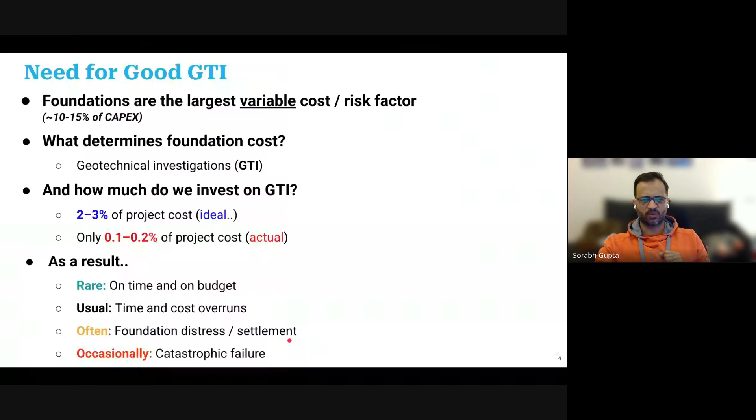So the first question is why - why is geotechnical so important in the industry? For any project, the foundation cost is the largest variable cost or risk factor. Typically these days the foundation cost will be roughly 10 to 15% of the capex or total project cost. This is huge because margins, especially on EPC contracts, are very tight. People are competing for the same projects, and if you can understand and optimize your foundation design, that is the only way to make money and also avoid a lot of risk.

The superstructure is pretty much predictable - the cost and time it might take to build it. The variable element on any project is only the subsurface. And what decides the subsurface, what decides the foundation cost? It is nothing but the output of the geotechnical investigation program.

How much should be spent on this? The international standard is to budget around 2 to 3% of a project cost for ground investigations. The reality in India is that for most projects, people are investing less than 0.2% of the project cost in investigations. The result of this is that we have a lot of delays in our projects - there's cost overrun, time overrun, sometimes foundation distress, and at times catastrophic failure.

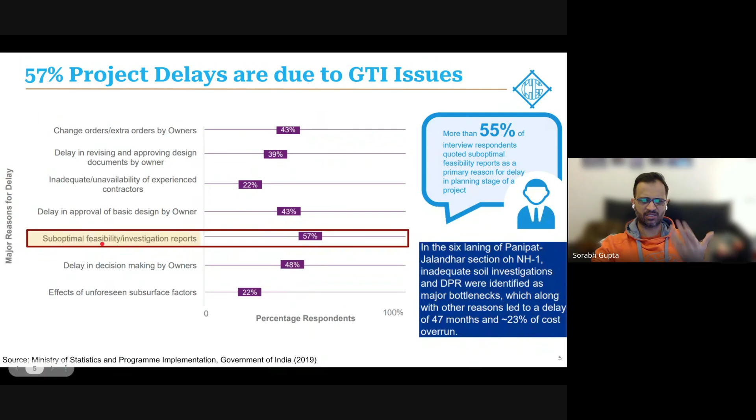There was a study by the NHAI, the apex body responsible for all highways in the country, a very interesting study by the Government of India in 2019, which showed that 57% of highway projects in the country had delays attributed to suboptimal feasibility or geotechnical investigation reports. If you calculate what this means in terms of cost to the government, that's huge - every delay is cost.

We have been talking about this, and I think as civil engineers who read papers, I find myself heartbroken when I come across news. I look at a lot of bridges which have collapsed in Bihar in the recent couple of years.

It's become almost so common that we don't even react to news like this. Some of you might remember, in 2019 there was a building collapse because of metro construction in Calcutta - a retention system collapse. Incidentally, in NCR we have had at least 2 or 3 retention system failures in just the last month. So these stories about collapse and foundation failures have become very common. It makes bad news, it makes Indian civil engineers look bad, and it's completely unnecessary because the only reason for this is our own apathy and lack of knowledge.

I love this quote by Professor Littlejohn. He says you pay for site investigations whether you do it or not - karo ya na karo, you have to pay for it, one way or the other.

If you read the papers, very recently, just a couple of weeks ago, there was a huge RE wall failure in Kerala. We are in conversation with NHAI as we speak. In fact, we are part of the committee where we are trying to rectify the issues and see what we can do about this.

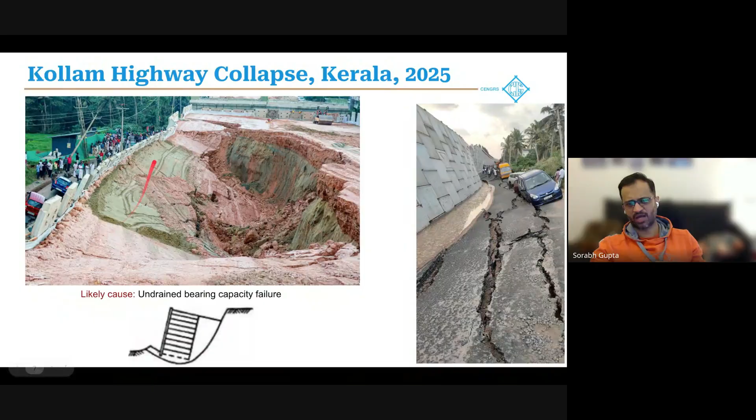Unfortunately, practically in India - and we've been doing investigations for the last 35 years, particularly for smaller projects - the story is very different. When you meet the customer, it's almost a negotiation. They want to negotiate, reduce or eliminate investigations if they can, or minimize them. They want everything done fast, and they don't care about the quality of the work.

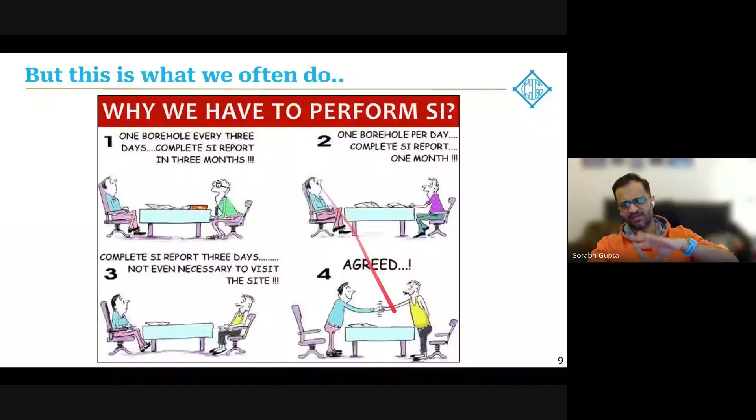And unfortunately, on the other end of the table, you have enough geotech consultants willing to accept these kinds of conditions and give a report without doing a proper investigation. This is really the root cause - this kind of scenario is the root cause for many of our problems. I think as students, when you're learning and graduating, you have to keep this in mind: when you go into the industry and see these practices, you have to understand that this is not right, and you have to fight against it.

The Indian scenario is poor in the sense that, although it's improving, it's improving slowly. Right now, I'd say it's still poor - a lot of our standards are still outdated, a lot of specifications are obsolete, and awareness of good geotechnics is very low among all stakeholders.

Owners, designers, structural consultants, architects, even within the geotechnical fraternity, awareness of good geotechnics is very limited, and that's what we are trying to change.

Through opportunities like this. There are very few good investigation companies. I would peg it at less than 1% of the total number of companies are actually good companies doing authentic data. Many companies are out there giving inauthentic data, inauthentic reports. They may not be carrying out all the tests and they're just fabricating reports.

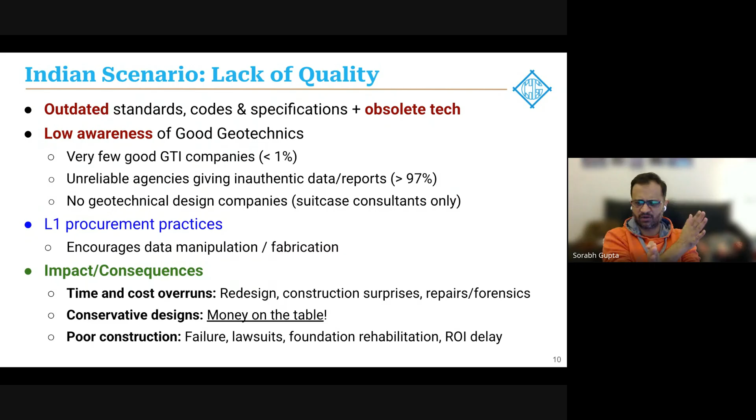On the other end of the spectrum, most of our other projects which are not falling down, it's likely because the design is over conservative. Conservatism is not good engineering. Conservatism is leaving money on the table. It's lazy engineering. Correct engineering is you have to be correct - you can't be over conservative, you can't be risky. You have to be just right, right where the money is. That is good engineering, and that's what we are trying to get to.

Similarly, in geotechnical investigation, we have some very conventional, simple, easily available tools like your boreholes, your DCPT, plate load test, and that's sometimes good enough if the symptoms are not very strong. But with advancements in medical technology and engineering, if you have some more serious symptoms, you go to a doctor who does some advanced tests, maybe a CAT scan, MRI, something. Same way, if your project complexity is slightly more - if you're building a larger structure or in a complex geotechnical scenario with complex subsurface conditions - you have to up your game and move to more advanced testing methods so that your foundation design decisions are based on data, not based on feeling or subjectivity.

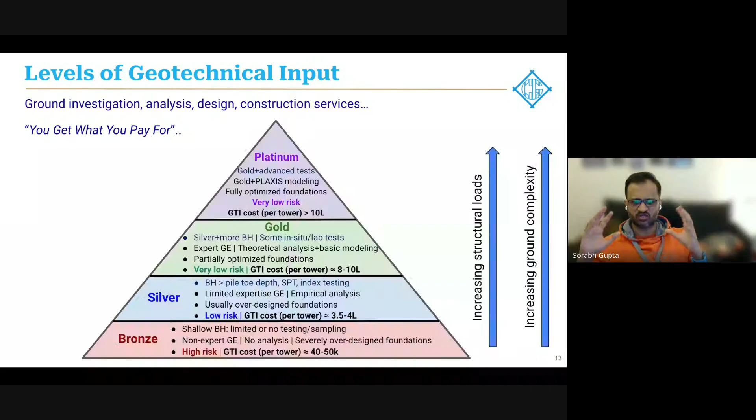As these things happen, you have to move up the value chain and the level of geotechnical input has to improve. In a gold level investigation, what we typically do these days is a staged investigation, where I combine my conventional boreholes with advanced in-situ tests like CPTs, pressure meters, cross holes, and so forth.

So I can have a better ground characterization, and by doing that I also improve my analysis part. I improve my analysis by looking at softwares, doing FEM analysis, and other complex analyses.

Now, the reason for going up the value chain is that as you do, your strength reduction factors will improve, your cost of foundation is going to reduce, and also your time of foundation construction will go down. It's very obvious that is how it works, and I'll show you today a few case studies on how we achieve this in practice.

So with this in mind, let's touch upon the areas of improvement. I think everything starts from awareness. Sessions like this, interaction like this, is how we all build awareness. We share from each other's experiences, we learn from each other's mistakes, and that's all about awareness.

That's number one. Number two is obviously the selection of the geotechnical consultant. Once you're aware, you'll automatically choose the best consultant, not the cheapest. Just the same way these days we are very aware about medical sciences, so all of us want to go to the best doctor, get the best test done. We are not looking for the cheapest doctor if I'm unwell - I'll go to the best if I can afford it.

Data reliability, I cannot overemphasize this. This is very important. A lot of students these days, it's become fashionable to just do your thesis with softwares. Softwares are great, but what you have to remember is that the input data which goes into a software is the key. If you don't understand where the input data comes from or which input data to use, you are simply doing garbage in, garbage out, and softwares will not help you improve your design.

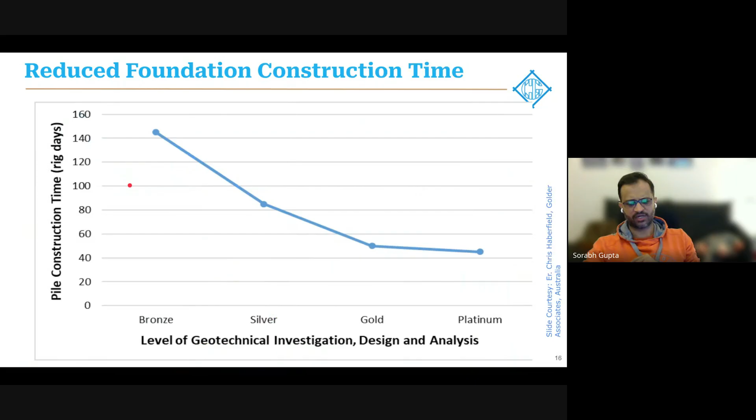Defining the SI scope - if you have a project, you have to define the scope of the geotech investigation. It cannot be a copy-paste job. The effort must be made by all the stakeholders: structural engineer, architect, geotech consultant. Everyone should sit down together, discuss what is being built, what are the likely challenges at the ground, and define the scope of the investigation so that we get all the inputs needed at the time of design, and there are no construction surprises.

Selection of SI tools is very important. As I said, you have to customize this. You cannot just do borings everywhere. Depending on the site, you have to choose the tools that you have to use.

So we can come up with some kind of a risk-based flowchart for site characterization, again very similar to the bronze level. If you have a low-risk project, you can do a simple bronze level investigation. But as your project complexity or risk levels go up, it is important to tailor make your SI program.

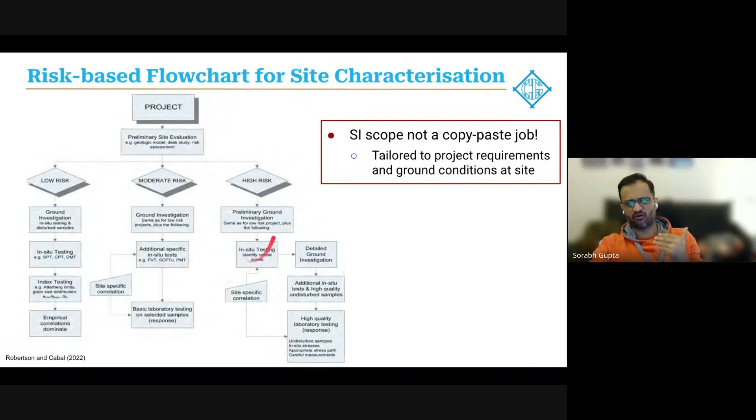So you may have to do a staged investigation. Maybe you do a preliminary ground investigation, get a little bit of data. You may have to follow up with in-situ testing, detailed investigations, site-specific correlations, lab testing, and so forth. So there are stages, and this flow chart has to be defined early on in the project, so we know where we are headed.

So we talked about why investigations or good geotechnics is important. We talked about what good geotechnics is. Now let us look at some of the tools.

This is a slide also by Professor Mayne, and I love this slide because I think particularly in India, if people talk about geotechnical, they think about boreholes. We want to change this because I think it's time. Boreholes are good in their own place, and the strength of borehole investigations and SPT is only in the fact that it is cheap, it is easily available, and we are comfortable and familiar with it. But that does not mean that boreholes are enough.

Over reliance on SPT N values is not good. SPT stands for standard penetration test, but there's nothing standard about the SPT value. It depends on all of these parameters. Very honestly, if you do SPT at the same site, maybe at two different locations, or two different companies are doing it, chances are the SPT values are going to be very different from each other. So it's hard.

Borehole investigations, I feel, are hard to get right. It's a very manual, slow process, and there are many uncertainties, many sources of error. So it's very hard to get borehole data right. You have to remember, it's not just SPT, it's sampling, the way you collect the samples, the way you transport them, the way you do your lab testing. You have to be very serious, and you have to have a very robust process to get this right. Keep in mind also that in boreholes, a lot of the interpretations we have based on borehole data are going to be empirical and based on judgment.

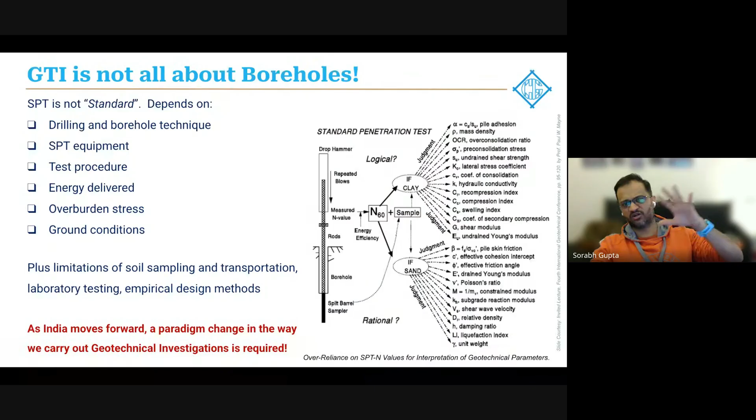So it is very important as India moves forward, I think a paradigm change is required in the way we carry out geotechnical investigations. 20 years back, when I started my career in the US, even at that time, they used to do very few good quality boreholes, and they used to do a lot of in situ tests for all kinds of projects. It's taken us in India, unfortunately, 20 years to get to that stage. But nowadays, when we do investigations, things are changing. We are doing fewer boreholes, and we are depending more on in situ testing.

Speaking of boreholes, let's understand standard penetration test because this is here to stay. I don't think the SPT is going anywhere. You will need this on many project sites, largely because of its ease. It's easily available everywhere, right? So let's see how to get SPT right. I would talk about two, or rather three things.

The first is you have to remember the weight of the hammer has to be calibrated. Second, anytime you see a borehole report, you have to go back and ask the agency if they have used an automatic trip hammer. Why an automatic trip hammer is important is because if the height of fall of the hammer is not consistent, your N value is incorrect. IS 2131, incidentally, has been published this year. It also mandates the use of an automatic trip hammer system. Many kinds of SPT arrangements are there, but having an automatic trip system or release system is very important.

The third thing which is very important, if you look at the books, if you look at values, the N value is always written as N60. N60 means 60% of the potential energy is being transferred to the ground. Now, you don't know if it is 60% if you don't measure the actual energy transfer ratio. So how do you measure it?

You use an equipment like this. It's called an SPT analyzer. What this does is you have an instrumented rod, which is placed here in line with the SPT equipment. It's got accelerometers and strain transducers built into the rod. So when you actually carry out the SPT, this equipment will measure what is my energy transfer ratio. So the ETR value, once you know, you can correct your measured N value to N60 value.

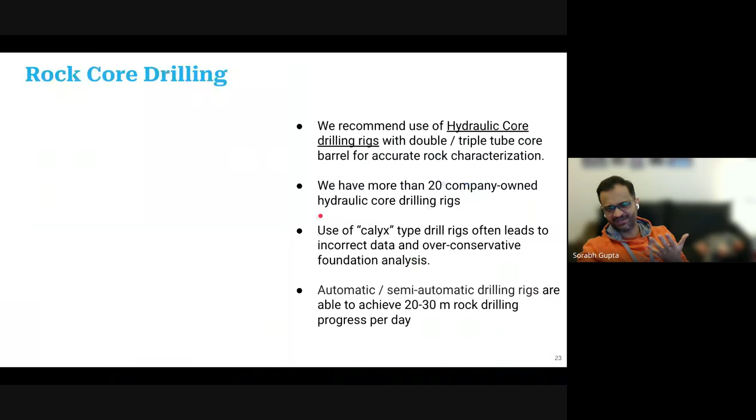Why is that important? Supposing I have a site where my SPT N value is 10 and I assume a 60% ETR, I'm going to calculate an SBC value of 100 kPa. But in most cases, if you use an automatic trip hammer, we have seen that the actual ETR is around 75-80%. What that means is the N value of 10 should be corrected to a value of 13. That means your actual SBC value is not 100 kPa, it can be bumped up to 150 kPa. Now, 50% increase in your bearing capacity value, you can imagine the amount of cost saving the customer can get. On the other hand, if the actual ETR value is 40%, that means my 100 kPa value was incorrect and risky, and it should actually be around 75 kPa.

So irrespective, the takeaway is SPT energy and automatic trip hammer should be mandatory for all investigations done using boreholes. This is changing these days. We are also pushing to have it changed in the specs. But we have to remember that these two things should be made mandatory.

If you look at rock drilling, what I want to explain to you is if you have a site, like in Shimla also you have a lot of rock, you have to remember that most of the geotechnical design is done based on core recovery and RQD values. Now, core recovery and RQD is also a function of the tools which are used during investigation.

So if you're using a calyx kind of drilling machine, or single tube core barrel, what will happen is that your rock core in situ might be solid rock, but because of the sample extraction process, if there is vibration in the machine or if the tools are not good, those cores will break while coming out. So when they come out, you look at the rock core and feel, oh my God, my rock is highly fractured, I should probably use a very low SBC value for design. Whereas the issue was with the tool, not with the rock formation.

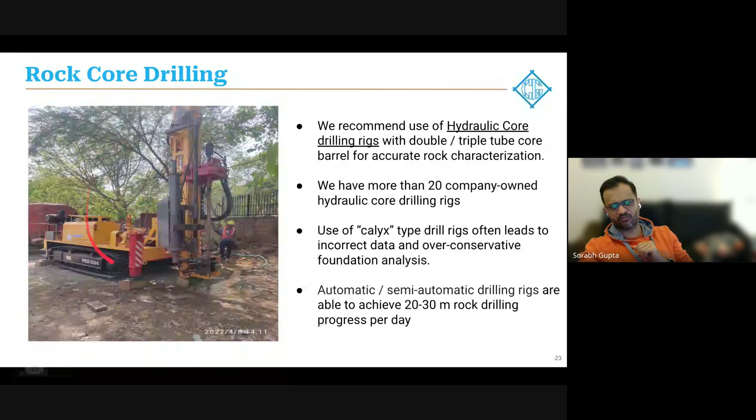So using these kind of proper hydraulic drilling rigs is very useful because this is the amount of difference it makes. This is a site on the river Tapi which we did a couple of years back. The customer had done a soil investigation work report already, and the design was already finalized. As per the report, the core recovery values were in blue, they were very low, and the RQD values were also very low. Basis that, they designed these huge footings for the bridge.

Unfortunately, when the contractor went to actually do the construction and started the excavation process, the contractor complained that the rock was very hard, which was not expected. So the work got stopped, they were unable to excavate, so they called us in.

We went back with a hydraulic rig with triple tube core barrel. We did some confirmatory investigations and we realized that the actual core recovery values were very high. They were not these blue values, they were the pink values. The RQD values were also much higher.

When we redesigned the foundations, we realized the impact of this exercise was that we could reduce the size of the foundations, we could reduce the depth of the foundation. And just for an investment of 15 lakhs, the customer managed to save almost 2 crore rupees only in foundation cost saving, let alone the time saving.

So that is the power of good geotechnics. All it takes is awareness. It doesn't take money, it doesn't cost much to have these kind of savings. You only need to be aware of what is the right thing to do.

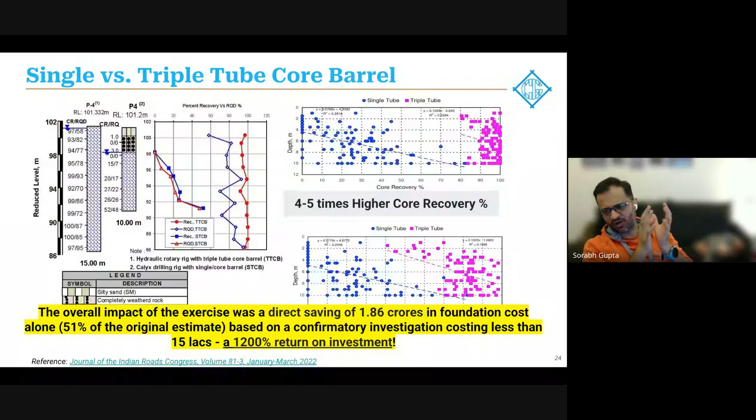So I'll recap: with SPT, automatic trip hammer and energy measurement is mandatory. If you have rock and you are coring in rock, insist on a hydraulic drilling rig with a triple tube core barrel. That is the industry standard as well.

The third thing, even in conventional borehole investigations, is make sure that the laboratory is well equipped. It has sufficient equipment, sufficient technicians to be able to handle the amount of testing that is required. I cannot overemphasize this.

Unfortunately, a lot of investigation companies are not doing the lab testing. They're simply taking the samples, doing a few tests, and fabricating the rest of them. These kind of spurious reports are creating a lot of issues in the industry. So we have to be sensitive, we have to be aware of this. We have to know, as a good geotechnical engineer, how to assess a laboratory for its capability.

Another thing, remember I told you that GTI is not just about boreholes. So these are all the tools which are available to us. Many of these tools, until around 10 years back, were not present in India, but these days I'm happy to say several of these tools are available with us, with a lot of companies, and we must learn about these tools and which tool is good for what kind of ground conditions.

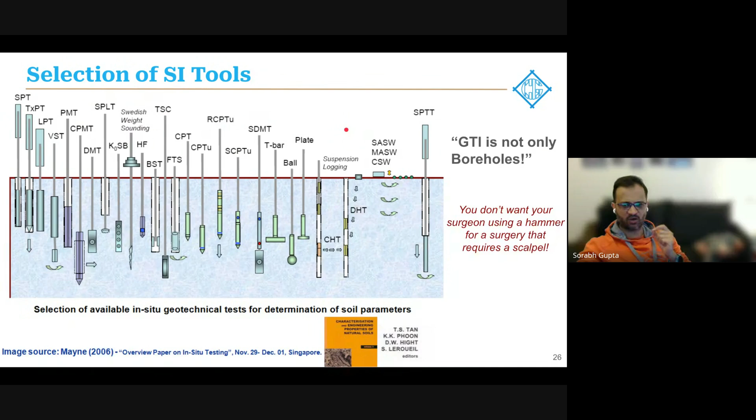So of these, I want to give you a quick introduction on a few tools. The first one is the electric cone penetration test with pore pressure measurement, also known as the CPTU. I think Dr. Abhishek will talk about this in detail in the next presentation, but I'll just introduce you to what this is. Around 60 or 70 years back, they invented the CPT cone.

So this is an electric cone, a piezo cone, as it's known. It has built-in sensors for measuring the cone tip resistance, measuring the sleeve friction, the pore pressure, depth, inclination, and sometimes even geophones and other things. There is no borehole involved, directly you take the cone and it can be pushed into the ground. As you push it into the ground, you get this data in the laptop: the cone tip resistance, the sleeve friction, and the pore water pressure.

Let's compare boreholes versus CPT. I'm giving you the advantages here - how the test is done, Dr. Abhishek will cover. The first benefit of CPTs, and the greatest benefit, is time.

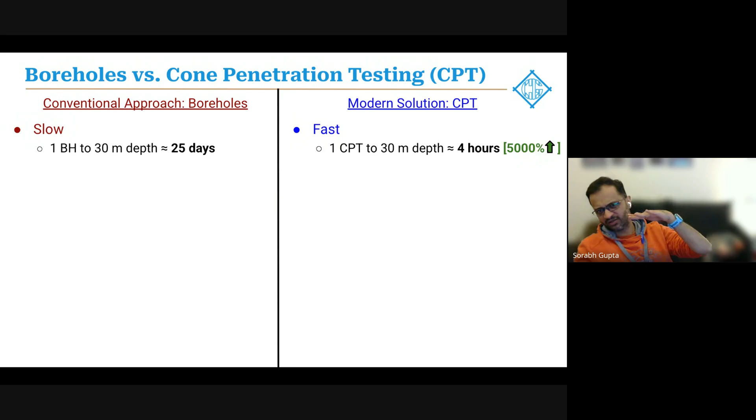One borehole to 30 meters - by the time you do the sample collection, take the samples to the lab, do the lab testing, you get a report in around 20 to 25 days. In a CPT, it's very quick because it's a digital technique - you just push the cone down. You can do a 30-meter test and get the report in just about 3 to 4 hours. That's huge, because it means you can collect a lot more data for a lot less money and in a lot less time.

The second comparison is that borehole data involves doing SPTs every 1.5 meters, so sometimes you might miss a few layers in the ground, and that becomes a surprise later during construction. In a CPT, because it's digital, you're taking data continuously with a resolution of 1 centimeter - a data point every 1 centimeter. Even a thin seam in the ground can be caught with CPT, which I'd definitely miss using a borehole.

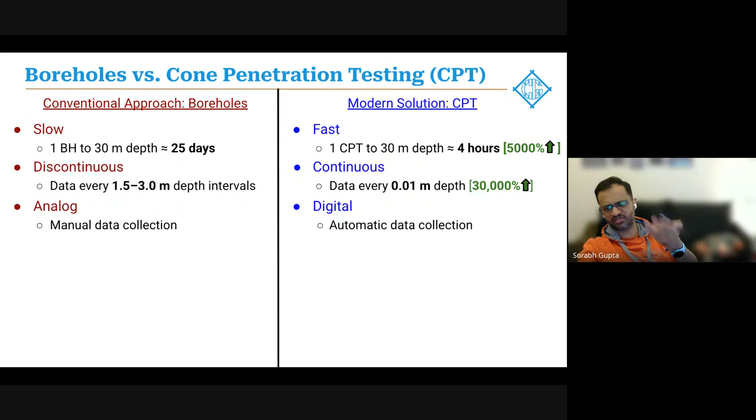Boreholes involve manual, analog data collection, so there are many sources of error - human errors, transcription errors, and so forth. CPT, because it's digital, doesn't involve human beings in that way. As long as the cone is calibrated and you just push it, irrespective of who's operating it, which company, or what tool is used, you get the exact same data every time. Digital data gives you repeatability, reliability, and no transcription errors - the file is created, imported into software, and the software generates a report. Because of this, reliability of the data is very high.

The last point is that CPT is very versatile. In a borehole, typically the only field measurement you get is the SPT N value. Whereas with a piezo cone test, you get multiple measurements at the same time - cone tip resistance, friction ratio, pore pressure. You can also stop the cone and do a dissipation test, getting T50 values which give you an idea of consolidation and permeability. And if you're using a seismic cone, you can also test for the shear wave velocity profile at the same time - much more versatile.

The most interesting part is that these days, at least at Cengrs, post-COVID we got the cost of CPT down to the same as the cost of boreholes. Earlier, CPTs in India used to be very expensive. Now, whether you do a borehole or a CPT, it's the same cost to the customer - whereas obviously CPT is cheaper, faster, and better.

The other good news is that we've also imported CPT samplers. So what we do now is use the CPT equipment to push a sampler - this is known as a MOSTAP sampler. We can push this sampler into the ground and take fairly intact soil samples at any desired depth. This is also a huge advantage of modern CPT equipment.

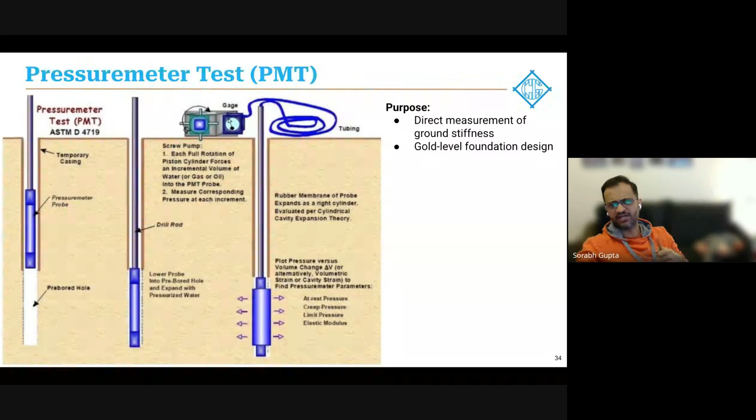How it works is you basically have a pressure meter probe like this, which is lowered into a borehole. When you lower it, you expand the probe. It's like a balloon. As it inflates, you expand it and measure the pressure versus volume graph. The slope of the pressure versus volume graph gives you the in situ measurement of the ground modulus. Simple as that—it's a very simple test.

The advantage of this test is, normally, how do you get modulus values? You'll do a borehole, get your SPT N values. You may or may not correct your N values to N60 or N60CS. But whatever empirical way you correct your N value, you typically have to plug it into one of the formulas—maybe a Bowles correlation, which gives modulus based on N value as 2.5N plus 15. So you'll get this kind of a profile.

But there are 5,000 other correlations with the SPT N value. Pick a different correlation, you might get a different ground modulus profile. So you see how if you're solely based on empirical correlations with SPT N value, your understanding of the actual ground modulus is going to be very poor—not only because of variability in the actual SPT N values, but also because of variability in the modulus values as interpreted from them.

What you must take away from this is two very important concepts. The first is, if you have a way of doing in situ testing, it's very likely that your degree of confidence in your ground modulus value will be a lot higher, because they're direct measurements, and because usually if two different methods agree with each other, that gives you a lot of confidence in your input values.

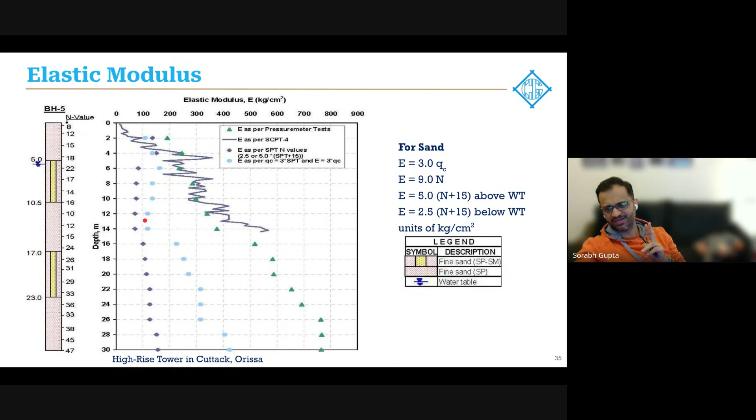Number two, in this case, at the founding level, the actual modulus value as measured from CPTs and pressure meters was 4 times higher compared to what we were getting from correlations. This tells us that our actual ground stiffness is very often much higher than what we think it is. And what that means for all of us as engineers is there is tremendous potential for optimizing our designs in most cases. So this is key.

No matter what we do, when we sit down to define the scope of investigations, this is where we should think: how am I going to get not only the strength parameters, but also understand the ground modulus, the stiffness parameters of my site, so I can give my customer a very good geotechnical design.

So that's with the pressure meter. I want to touch upon seismic testing also. I think in the years to come, starting this year, this has become very, very important. And in the next 20 years, all of you will see a lot of seismic testing happening.

Why? What is seismic testing and why do we need it? The Indian BIS standard, IS 1893 Part 1, has been revised last month. And now, finally, after a lot of time, I think this new standard mandates that you have to define the site class based on shear wave velocity.

For most buildings in most parts of the country, you will mandatorily have to do seismic testing in situ on the site in order to get your site class. The site class has different classes for the site, which is used in the seismic design of the structure. So you need seismic testing or shear wave velocity testing, as per the code, in order to determine the site class. So that's reason number one.

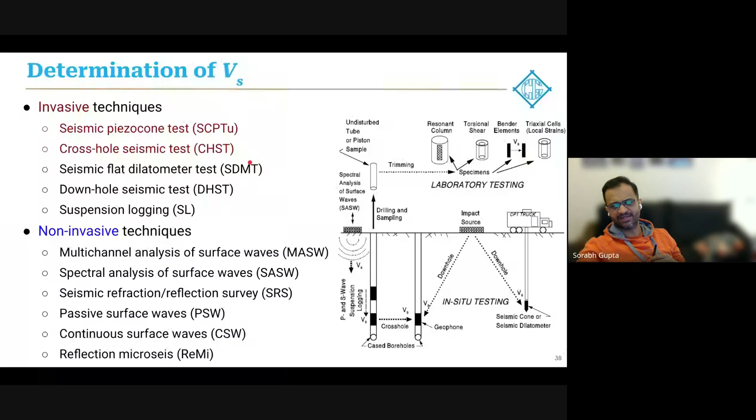This is what a cross-hole seismic test looks like. Very quickly, you make 3 boreholes - this is what the equipment looks like. You lower a seismic source in the first borehole, and triaxial geophones in the other 2 boreholes. When you impact the source, energy is produced along with waves which travel in all directions, and these geophones catch it.

There's another option. Remember we talked about CPTs - we'll discuss seismic CPTs in detail. The piezocone can also be upgraded by putting a seismic module above it, and then this is called a seismic cone, SCPTU - Seismic CPT, U stands for pore pressure. This is the latest technology. In fact, I think we are the only ones in the private industry to have a seismic cone so far. We imported a seismic cone for the first time less than a year back, and we're getting some fantastic results. I'll tell you why.

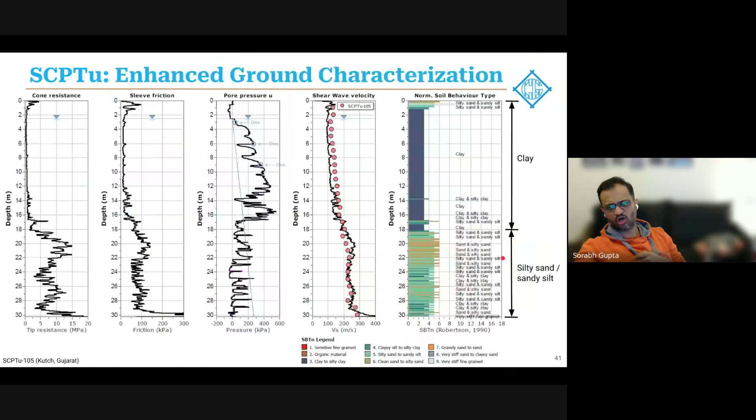In an SCPTU, a seismic CPT, this is what the data looks like. With a single push you get cone tip resistance, sleeve friction, pore pressure, shear wave velocity, and soil type. This is the power of in situ investigation - so much data at the drop of a hat. A single SCPTU test is very versatile - it gives you soil behavior classification, strength and stiffness parameters, consolidation and permeability parameters like OCR, and if you're doing a dissipation test, you also get permeability characteristics. A lot of parameters from a single test.

I'm going to skip this, I think it's very theoretical. I'll quickly show you some of the others. So these were all geotechnical tests - I'll quickly show you some of the geophysical tests which are also available.

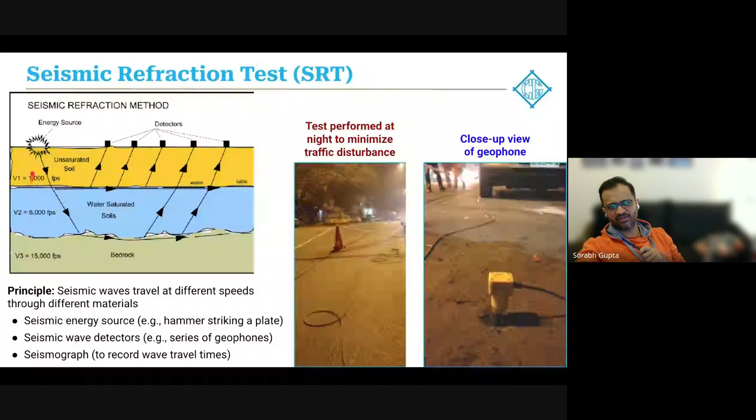If you have a site with varying depth of rock and want to understand how the rock depth varies across the site, a seismic refraction test is a fantastic geophysical test. You spread geophones along the ground, use a surface hammer, and by Snell's law you can figure out the velocities of different layers and where the hard layer or rock starts. That's what seismic refraction test data looks like.

I always emphasize that if you're doing a geophysical investigation, you must cross correlate the results with actual geotechnical investigation results. These two things are like brother and sister, they have to go together. You should avoid doing geophysical investigations standalone - always correlate and double check your data before moving to the design phase.

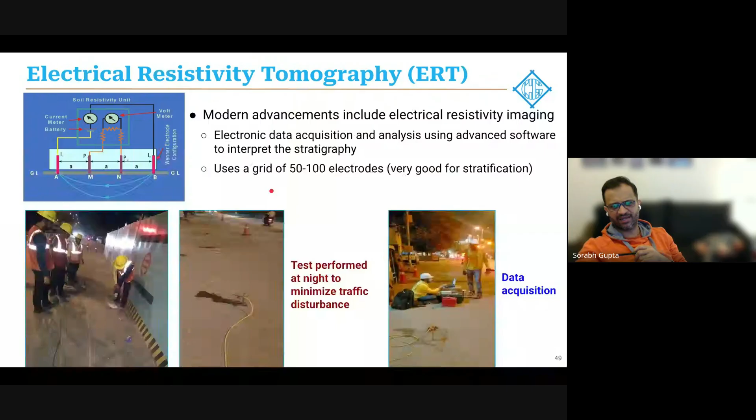This is electrical resistivity tomography, ERT - this is the kind of data you get from it. It's a very good geophysical tool, not only for profiling but also for detecting voids and other anomalies in the ground. You have other tools like SASW, Spectral Analysis of Surface Waves, and MASW, also very good profiling tools and good for getting shear wave velocity profiles fairly quickly and economically across a large site.

So these were the tools. Let me recap - we talked about what good geotechnics is and why it's important. We touched upon some of the latest geotechnical and geophysical tools for getting proper authentic data. Now let us see practically in the industry how we have leveraged this information to benefit our projects and our customers.

This is the first example - some of you might have read about this. We are working on India's largest wind turbine project, in the state of Gujarat, in a place called Khavda, in the Rann of Kutch. There, we have done investigations for 263 wind turbine generators - those big windmill structures that produce electricity. The scope given at each of these WTG foundations was boreholes and cross-hole seismic tests.

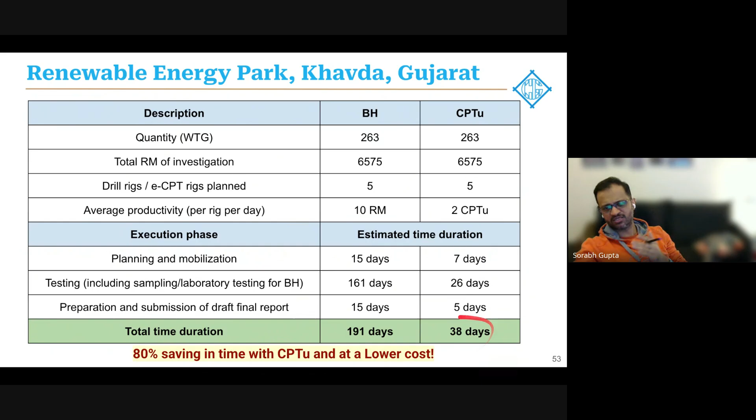And the data, the results - we actually did boreholes and CPTs at the same location to illustrate to the client how you get the same data. So we got the borehole data, next to it we did a CPT, and then we compared the soil type from the borehole and the CPT - it matched very well. We also compared the SPT N values.

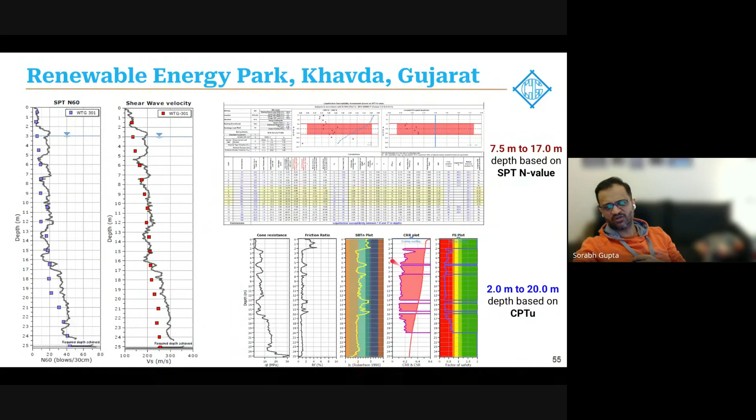So you see how, had we done a borehole and crosshole investigation versus what we do from CPTs, the output is the same or sometimes even better. Liquefaction analysis particularly was an issue here.

Same customer, different site, again in Gujarat, in a place called Mundra. Again terrible soil conditions. The client already had a basic borehole investigation report, basis which the safe pile capacity theoretical was calculated as 158 tons. This was a huge petrochemical facility, so the number of piles was 50,000, and 1,000 crore was the cost of the foundation alone.

We saw this report, and when the customer came to us and we looked at it, we felt, hey, number one, your borehole data does not look very reliable. It seems like the work is not being done, the lab testing has not been done properly, and we also felt that the pile capacity seemed to be over conservative. So the client asked us to do a confirmatory investigation.

We went back and we did CPTs, I think a lot of CPTs, 200 or 300 across the entire site. Basis that CPT data, we re-evaluated the pile capacities and revised the pile capacity from 158 to 320. And that's huge, because if you can justify higher pile capacity, the number of piles and the cost obviously went down to half. So 500 crores is what the client could save just in the cost of the piling system.

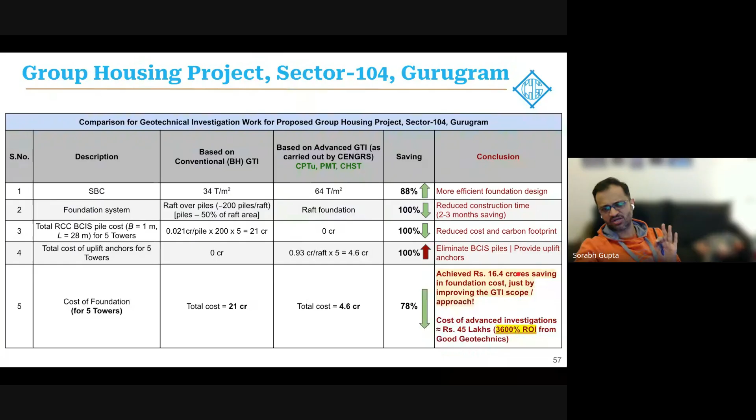So you see how, even if the client invested 45 lakhs in the investigation program, if I can save him 16 crores in foundation cost, there is no one happier than my customer, and it's a win-win situation for everyone involved.

Another example is this. This was for a greenfield steel plant in Ludhiana, in the state of Punjab. Same story.

The original report was based on piling, and the budgeted foundation cost in this case was 350 crores. We went back in and did around 125 CPTs, some 25 bores, and other tests. We managed to reevaluate, and the revised foundation cost was only 135 crores, simply because the site was liquefiable. We managed to optimize the liquefaction depth and the depth to which ground improvement was required, and based on that, this is the amount of money we managed to save for the client.

Possibly the last example is a very interesting project where the client came to us and said we have to build food grain silos in 66 locations across North India. So they came to us and we did the analysis at one location - this is Balrampur, Uttar Pradesh.

Same story. The client had done a conventional investigation program. It took around 46 days, cost around 2 lakh rupees, and they got this kind of SBC and a 4 crore ground improvement cost. So we went back to them and said, hey, not only is this over conservative, it's also taking too much time to do boreholes, and time was of the essence - this was a very fast project.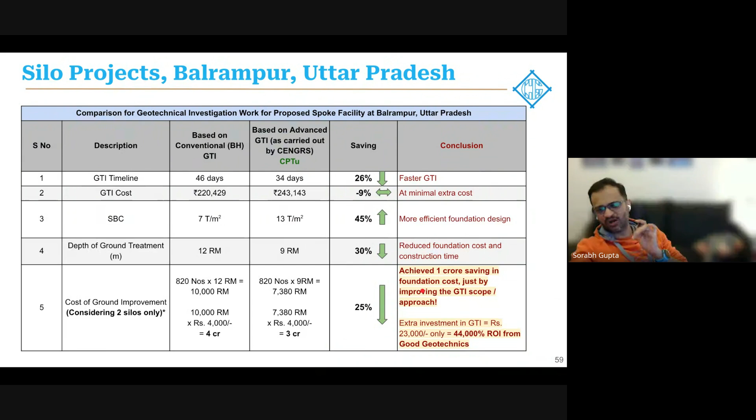Because we replaced a lot of boreholes with CPTs, we could finish the investigations a lot faster. The spend on investigation was the same because the cost of borehole and CPT is roughly the same - paisa to utna hi laga. Whereas the SBC value we could justify went from 7 tons up to 13 tons per square meter. The depth of ground improvement could be reduced, and the cost of ground improvement per site could be reduced from 4 crore to 3 crores. Now remember, this 1 crore is for one site - there were 66 sites. So 66 crores is what the client saved on these silo projects simply by being open to doing better investigations and better geotechnics.

And with that, I thank you for your time. I think I finished exactly on time, so hopefully we have some time for questions.

Thank you very much, sir. That was a very insightful lecture - something we don't discuss many times, why we actually need to do it and how we need to do it. I request the participants to please either post a question or unmute yourself to ask the questions. While participants pose their questions, I have a few queries of mine also. Can you please elaborate on the case of that retaining wall failure in Kerala? I think that was an RE wall that was still there - a lot of discussions went on in the IGS groups also.

Yes, you are right. I don't know how much I'm permitted to share, but I have a slide for everything, so would you like me to go through this since it's a hot topic? This will take... this is not so much about why the failure happened - this was a discussion. Actually, the Chairman of NHAI invited us along with a couple of other agencies recently to figure out what we can do about it. This is a presentation we made to Chairman NHAI just a couple of days back, about 10 days back. So I'll share what we shared with them.

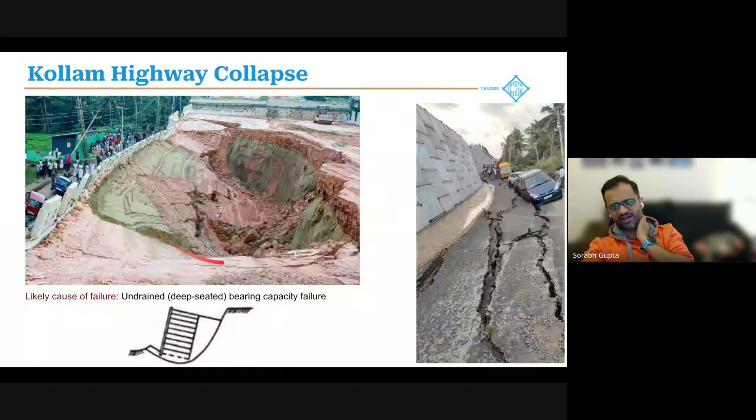So there are two kinds of failures. Sometimes the failure is within the RE wall itself, and that could be because of poor design or poor construction - maybe they don't use the right length of geosynthetics, maybe they don't compact the soil properly. But sometimes it is simply because they didn't understand the subsurface on which the structure is being placed.

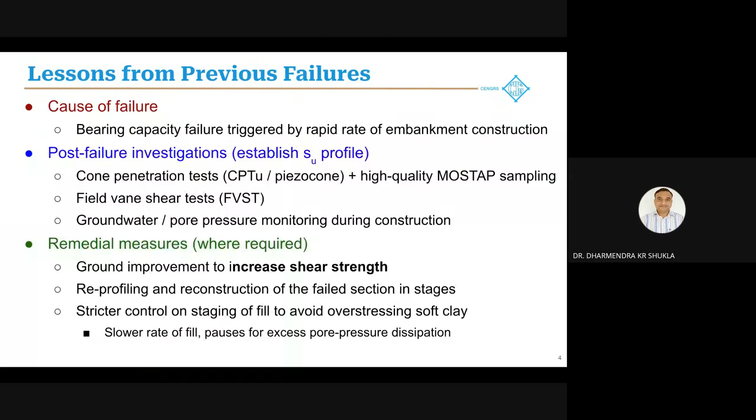So the lesson from this, and this is what we talked about - the cause of failure was bearing capacity failure triggered by a rapid rate of embankment construction. They didn't plan for it. There was no preloading, surcharge, no PVDs, no stone columns, nothing. Just directly started building on soft clay. So that's a classical, very simple geotechnical mistake. I think even in our college, they used to teach us not to do these things.

So then we talked about post-failure investigations. For this case, we made a case that to really understand this kind of ground, the intention is to understand the undrained strength profile. So for that, we said it doesn't make sense to do only boreholes. It's very important to do CPTs and also field vane shear tests, because that's the only way to really get your peak and residual shear strength profiles, the sensitivity values. You won't understand undrained shear strength if you don't do all of this.

So that's the case we made. Again, I don't know how NHAI will actually do it, but this is what we explained. And we also said that once you have your forensic investigations in place, you get your real data, you may need to redesign and you may need to add ground improvement.

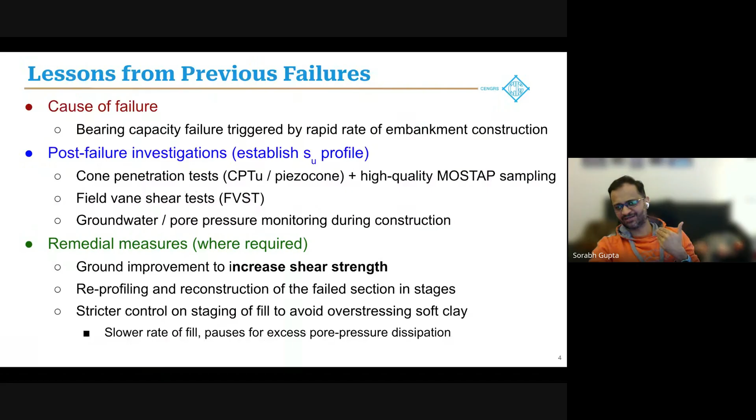This is a huge problem. NH66, this is 500 kilometers, 18 packages under construction right now. Out of 400 structures, 100 structures have been built and dozens are under construction. So these are two failures which have already happened back to back, but the others are also very likely to fail. For the country, I don't know, you're smiling, but I am very disappointed because I think as a country, this is just showing us how bad things have become. It's really bad.

So we gave them an approach, and the recommended approach was - first, because we don't have time, rain will start in May in Kerala. So we said we don't have time and we have to look at this. They were talking about 1,500 boreholes to be done. So we said 1,500 boreholes cannot be done in 6 months. Impossible to do it, and impossible to do it with quality.

So we made a case. We said, hey, it makes sense since we don't have time also, do a 2-phase investigation program. In the first phase, we do CPTs at every location, starting with the locations which are built or under construction. We can quickly look at the CPT data, cross-correlate with the earlier report. If it matches, then it's fine. If it doesn't match, that means you can't trust the earlier report - you have a low bearing capacity value. In that case, you should do a detailed investigation at the same location, including field vane shear test, and then do a complete redesign.

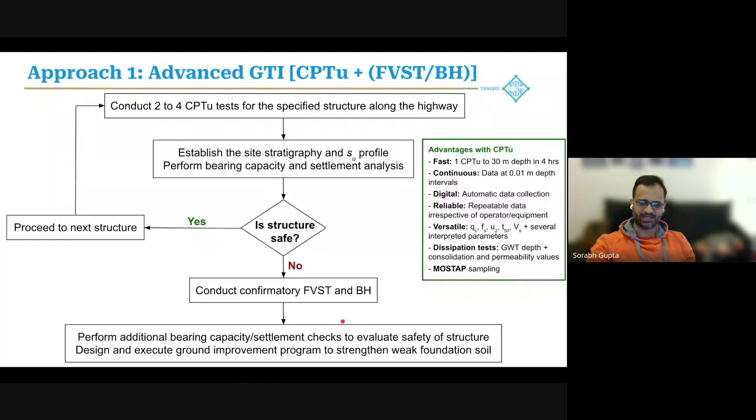So this is how we suggested, because we told them that even the IS code - nobody reads the IS code - but even IS code for RE wall structures clearly says that you have to test up to 30 meters below your RE wall, which was not done.

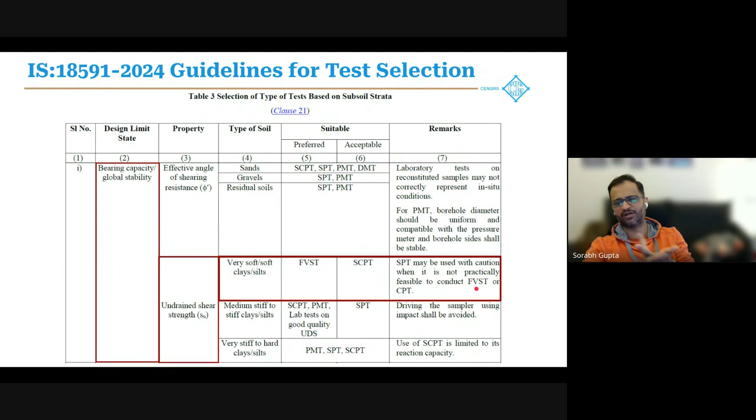It also talks about doing field vane shear test and CPT. Code mein likha hua hai, right? For these kind of soils, these are the tests which you should do. Code, in fact, also says SPT may be used with caution when it is not practically feasible to conduct field vane shear or CPT. This is our Indian code.

So Indian codes, if you read them, many of the Indian codes are very good. Right, aisa baat nahi hai.

So then this is the case we made. We said that borehole data may not be reliable, only borehole data may not be reliable, because of data errors, subjectivity, low resolution. You'll need a lot of resources to do so much work which we don't have. Sample disturbance, small sample size. So aise karke we made this case that you should have a holistic approach for at least the confirmatory investigation, do CPTs and field vane tests.

We also worked out for them, if you have to do 1,500 boreholes to 30 meters, right, so 45,000 running meter. So we also did this calculation and we showed them that if you have to do it authentically, this is the amount of lab equipment and these are the number of technicians which you are going to need to do this work in 6 months also.

Exactly, this is a tremendous task. Matlab aap even if you add up lab capabilities of all the labs in the country, I don't think you will add up to this much. Exactly, with other projects also happening. So we made this case.

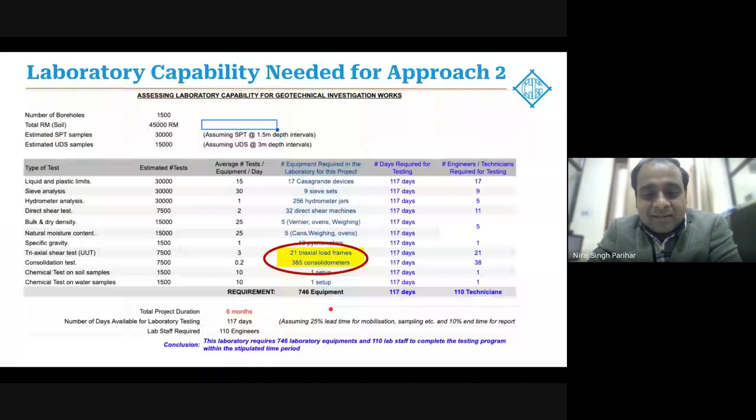And then we said, finally we said that if you use our approach, what we are saying, combination of in situ testing and boreholes, then it is possible to complete this work in time. Otherwise, yeh toh aapka 1 saal mein bhi nahi hoega kaam.

It is amazing to see that for such an important project, people are giving such kind of reports. I dislike that geotechnical investigation has all become a report investigation kind of a thing.

Sir, it all starts with awareness. Honestly, it's just awareness, awareness, awareness, awareness within the geotechnical fraternity, unity within the fraternity, and awareness outside of it. I think this is something one or two people can't do alone. So everyone, I think I see 56 people here. I think all 56 of us need to leave this session and go out in the world, and we have to spread the word that these are avoidable issues.

Ya aisa nahi hai, it's like, kaise bataun, it's like aapko koi covid ho raha hai, covid ka ilaaj hai, aur kisi ko pata nahi ki uska ilaaj hai. It is exactly that kind of a situation, right? So it's an engineering pandemic which is happening, where we have the solution, we have the treatment, we have it in India, and we have it at a good cheap cost also. Just because of lack of awareness, this pandemic is spreading.

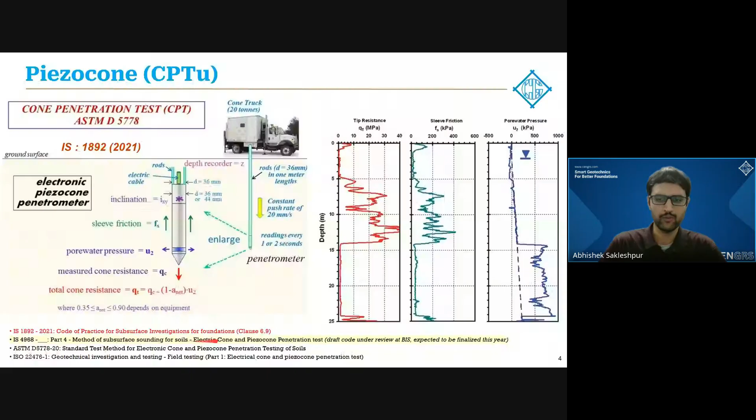We have a code of practice for subsurface investigations for foundations, but we also expect a separate standalone code for the CPTU to come out soon by the BIS.

In terms of the pushing equipment, we basically need a hydraulic pushing unit and a series of push rods. Here we can see the CPT probe or the cone penetrometer, and this is an expanded view of the penetrometer showing the various measurements we can get during the test.

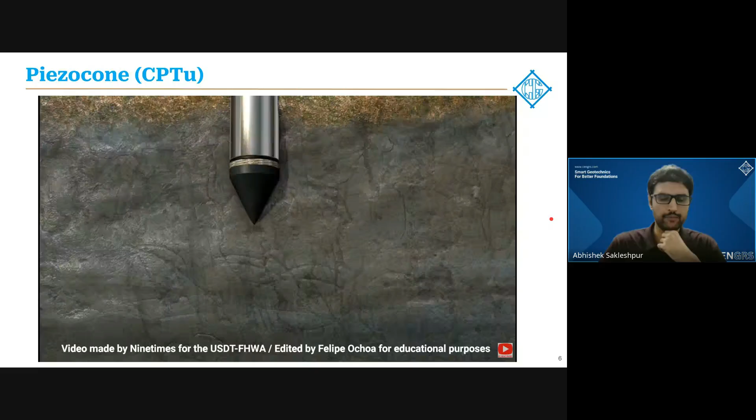This is a video showing the penetration of the cone into the ground. As the cone penetrates different soil layers, you can see we measure the cone tip resistance, sleeve friction, and pore pressure, obtaining continuous profiles of these parameters in real time in the field.

As we transition from one layer to another, you can see the change in resistance. For example, low cone tip resistance, where you might expect soft clay, increasing to higher cone tip resistance in competent layers.

The systems we can use to push the cone into the ground include anchored trailer-mounted pushers, as you can see in the photographs here. The source of the reaction for pushing the cone comes from augers, which we pre-install into the soil, and the pull-out capacity of the auger provides the reaction to push the cone into the ground.

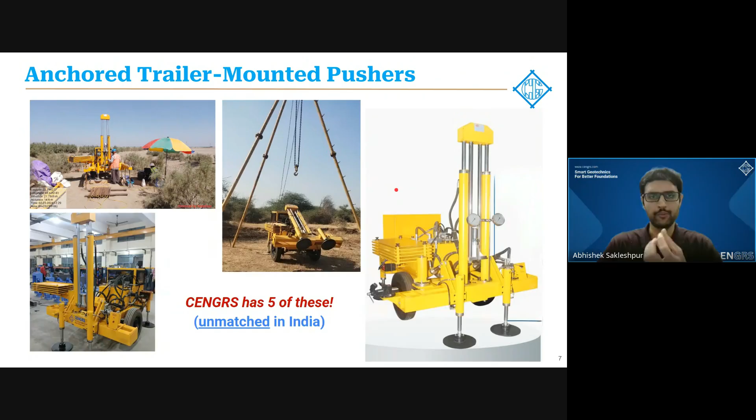Another type of pusher is the ballasted crawler-mounted pusher, where the reaction force comes directly from the self-weight or dead weight of the pusher, typically about 20 tons. So the push capacity also corresponds to a maximum of 20 tons.

The main limitation with the CPT is that penetration can be restricted in dense gravelly soils or highly cemented soil layers. The CPT cannot be used in rocky or bouldery formations, for obvious reasons, because it's difficult to push the cone in such ground profiles.

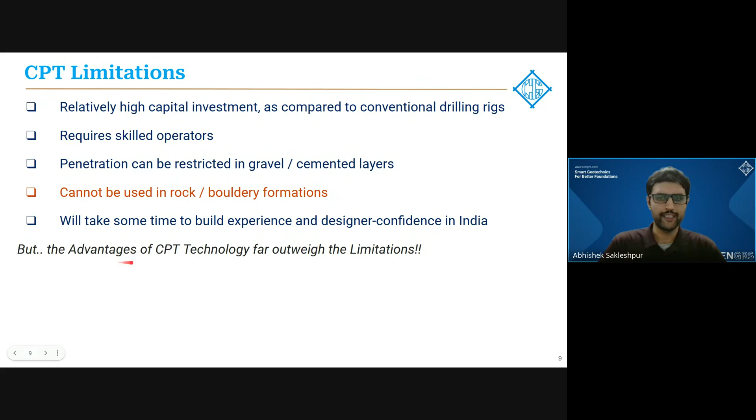But as we'll see in the following slides, the advantages of the CPT technology far outweigh some of these limitations. So what is the CPT advantage? In a nutshell, it's cheaper, faster, and better.

It is fast because the rate of penetration is 2 centimeters per second, which means you can complete a 30-meter CPTU sounding in just half an hour. The data is continuous or near continuous, as Mr. Sorabh Gupta mentioned, at a depth interval of 1 centimeter.

The data is highly accurate, and the electrical measurement of the cone tip resistance is continuous, recorded automatically in digital format.

The CPTU is versatile because we can measure as well as interpret several different geotechnical parameters that can be used in foundation analysis.

It is possible to perform CPTs to deeper depths, almost up to about 100 meters, where we have soft clays, for example. The CPTU is reliable because you can get repeatable data irrespective of the contractor, the operator, or the equipment used to perform the test.

You can get soil sampling with specialized CPT samplers called MOSTAP samplers, which we'll see in the following slides. The CPT is modular, so it can be combined with various other sensors.

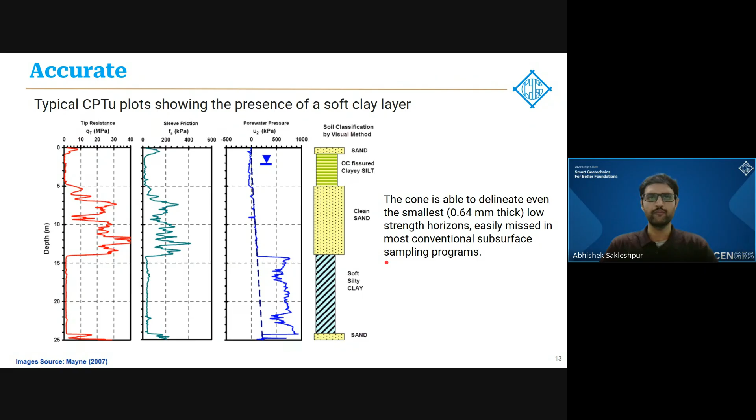Now, the CPTU data is repeatable. This is an example from Professor Peter Robertson showing two CPTs performed 1 meter apart, and you can see that the data overlap with each other quite well.

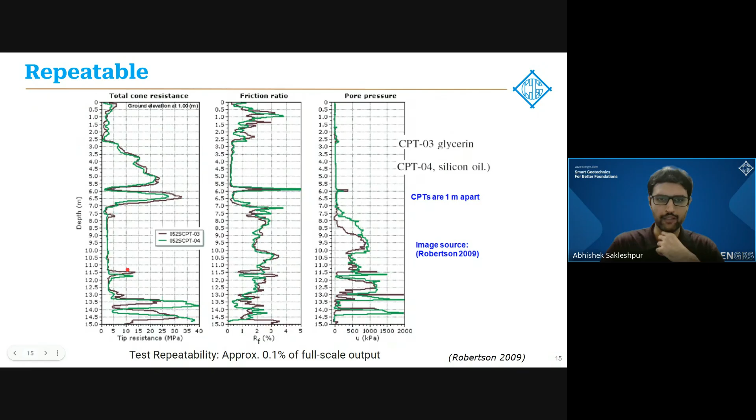In terms of identification of soil type from CPTU, we use soil behavior type charts, where on the x-axis we have friction ratio, which is nothing but the sleeve friction divided by the cone tip resistance. On the y-axis, we have the cone resistance normalized by a reference stress.

After performing the CPT, depending on where the data points plot on the soil behavior type chart, we can classify the soil. If the points plot in zone 4, for example, it's likely to be a clay silt to silty clay type of soil. On the other hand, if the data points plot in zone 6, it's likely to be a clean sand to silty sand.

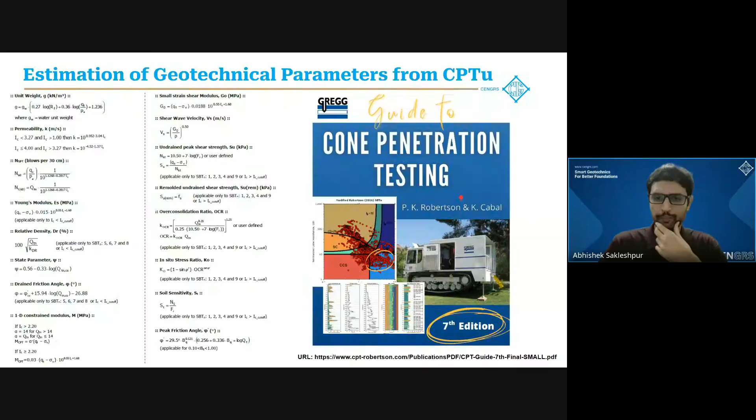This is the Guide to Cone Penetration Testing, the 7th edition by Robertson and Cabal. We can estimate a number of geotechnical parameters from the CPTU that can be used in foundation analysis and design. All the equations are listed on this slide, but we'll look at each of these parameters one by one.

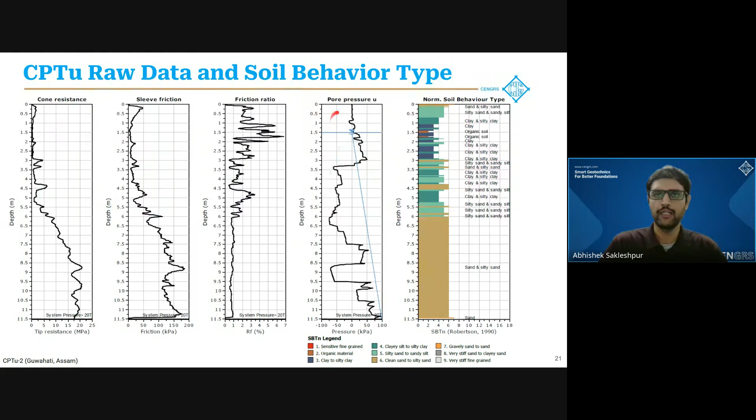Firstly, the raw data that we get from the CPTU includes plots of the cone resistance, sleeve friction, friction ratio, which is nothing but sleeve friction divided by the cone resistance expressed as a percentage, and then the pore pressure. Here in the pore pressure plot, the black solid line is the measured dynamic pore pressure during the cone penetration test, whereas the blue line is the hydrostatic pore pressure based on the groundwater table.

Next, we have a plot of the soil behavior type, the normalized soil behavior type as per Robertson 1990. Here we can see that the upper soil layers up to about a depth of 5 meters or so consist of fine-grained soils, so clay, silt to silty clay kind of materials. Below a depth of 6 meters, we have a sand layer, sand to silty sand. So as I mentioned previously, in the upper layers where you have the fine-grained soils, you have low cone tip resistance, increasing to higher values in the sand layer.

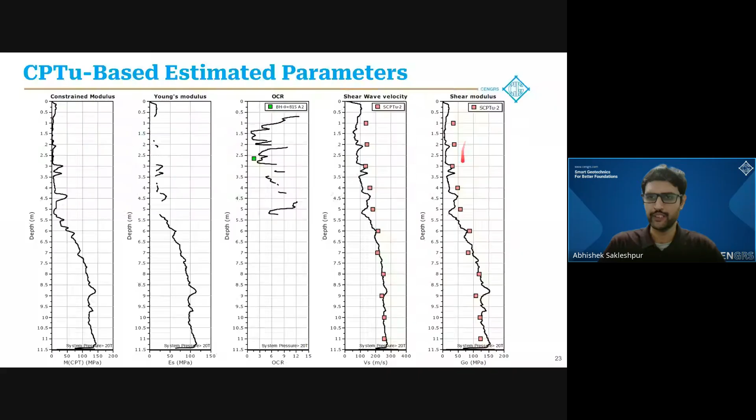Now let's move on to the seismic cone penetration test, which is termed SCPTU. So as Mr. Sorabh Gupta mentioned, why do we need seismic tests? First of all, as we can see in this figure here on the right,

75% of our population here in India is in seismically active regions. So seismicity is a critical point, and 59 to 61% of our land mass is under seismic risk.

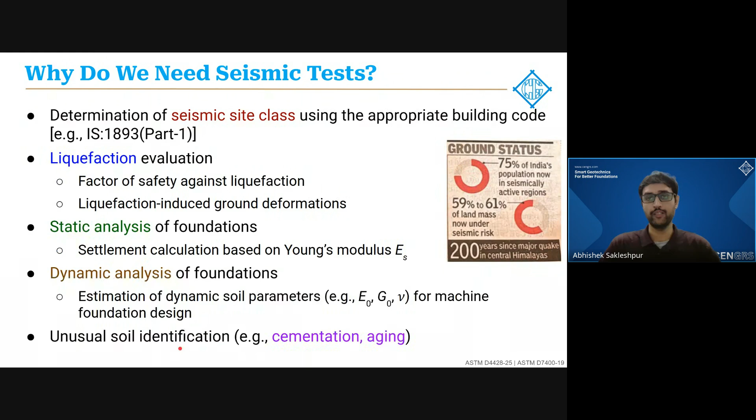In addition, shear wave velocity testing is mandatory for all earthquake zones, going from zones 2 to 6, as well as for various categories of structures, particularly important structures, critical structures, and special structures in these zones.

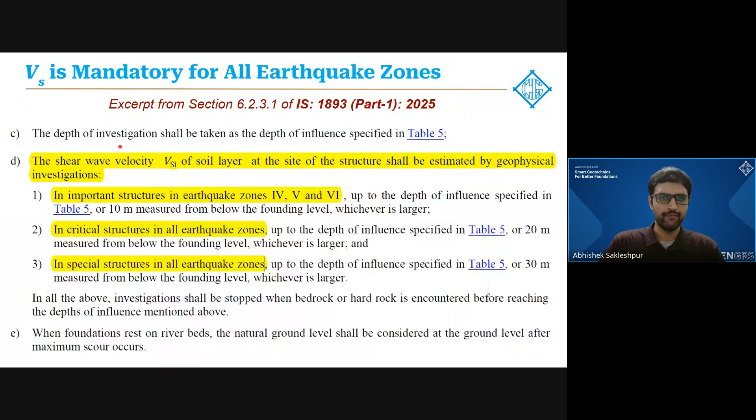In the case of pile foundations, the minimum depth of investigation should be equal to the length of the pile plus 2 times the pile diameter, as specified in the code. There are also other guidelines for pile groups as well as well foundations.

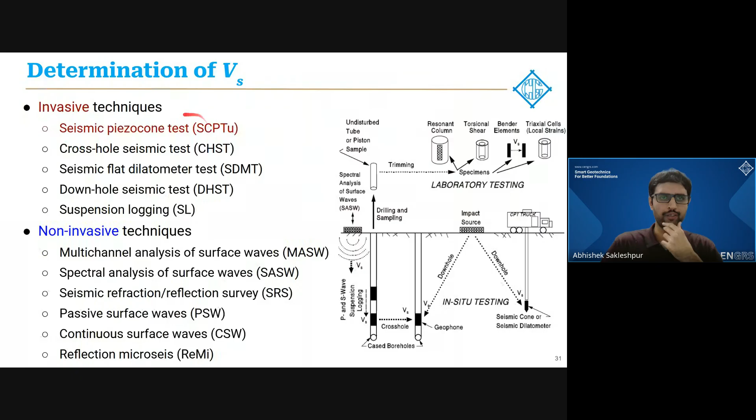There are a number of techniques available to determine shear wave velocity, broadly categorized into invasive or non-invasive techniques, as we saw in the previous presentation. Here, we'll focus only on the seismic piezocone test, or SCPTU.

The seismic cone penetration test works similarly to the conventional CPTU. The only difference is that we attach a seismic module to the CPT probe, and this seismic module contains geophone receivers that can detect the arrival of shear waves.

Usually there is a source for the shear waves on the ground surface, typically in the form of a shear beam. When we strike the shear beam, the energy or waves generated from that impact travel down into the ground up to the seismic module at the required depth below the ground.

Shear wave velocity depends on the time it takes for the waves to arrive, as well as the distance between the impact and the seismic probe, because shear wave velocity is simply distance divided by time.

The test can typically be performed at 1 meter depth intervals, so you can obtain a plot of shear wave velocity with depth, which provides a direct measure of ground stiffness. The seismic cone penetration test is specified in ASTM standards D5778 and D7400.

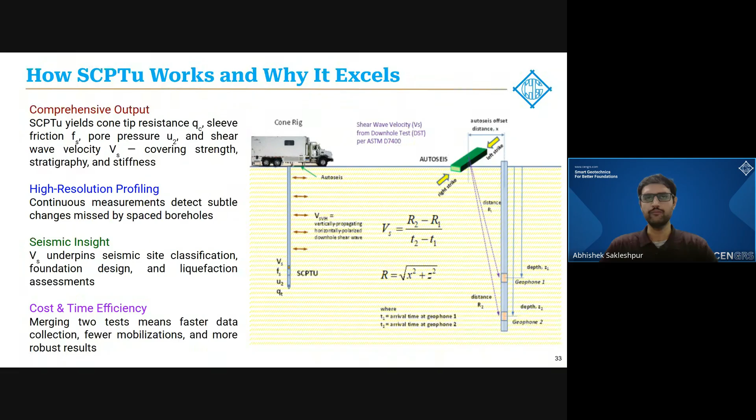The source to generate these seismic waves is in the form of pendulum hammers. Basically, we lift the hammer up to a certain height and let it drop. When the hammer strikes the shear beam, it generates seismic waves that propagate into the ground.

This sketch illustrates the propagation of these seismic waves. Typically the seismic module has 2 geophone receivers, or 2 sensors: a top geophone receiver and a bottom geophone receiver.

The top geophone receiver will detect a seismic wave, indicated in blue, and then the bottom geophone receiver will detect another seismic wave, shown here in red. As we know, the blue seismic wave will arrive faster than the red seismic wave, and you can see that in the seismogram plots.

The shear wave velocity is basically the difference in distance, S2 minus S1, divided by the difference in arrival times between the red wave and the blue wave. Once we get the shear wave velocity, we can calculate the dynamic small strain shear modulus through elasticity theory using this equation, where rho is the bulk density of the soil.

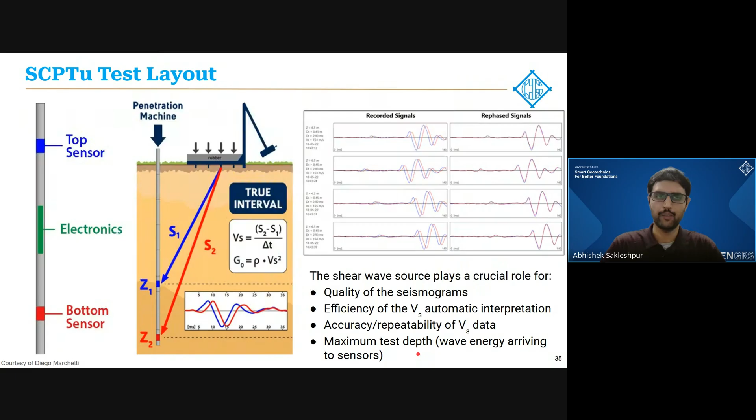It's important to keep in mind that the shear wave source plays a crucial role for the quality of the seismograms, the efficiency of the shear wave velocity measurement, the accuracy and repeatability of the data, as well as the depth up to which you can perform the test. So the quality of your wave source directly affects the depth up to which you can perform the SCPTU.

There are various criteria available to assess the quality of the seismic measurements. These seismogram plots typically consist of three features. First, an initial silence where you're waiting for the seismic wave to arrive at the geophone sensor. Once the wave arrives, you can see the main S wave picked up by the geophone. Then, as the wave passes the geophone, there is a tail that follows beyond it. So basically: an initial silence before the arrival, then the main shear wave, which is a high amplitude signal, and finally a tail corresponding to medium to low amplitude reflections and refractions.

Now, the main shear wave should exhibit a consistent delay between the waveforms. That means there should be a consistent delay between the blue wave and the red wave throughout the entire signal, because the shear wave velocity directly depends on the lag between the blue wave and the red wave.

Depending on the coefficient of variation of the seismic measurements - basically your standard deviation divided by the mean - you can then assess the quality of the seismic data. If your coefficient of variation is less than 1%, it means there is excellent repeatability. However, if it's more than 10%, it indicates poor repeatability of the data.

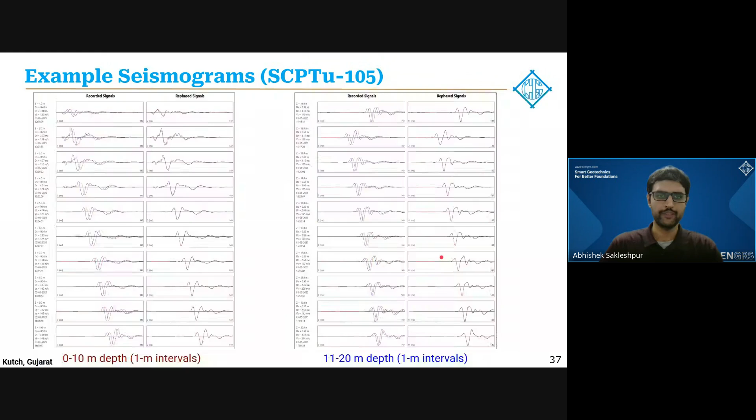The SCPTU is very versatile. You can do a dissipation test to get coefficient of consolidation and hydraulic conductivity. You can classify the soil based on soil behavior type charts. You can also get the stress history, preconsolidation stress, or estimates of the overconsolidation ratio. From the shear wave velocity, you can get the dynamic shear modulus, small strain shear modulus, and if you degrade the small strain shear modulus, you can get the E value to use in settlement calculations, as well as the undrained shear strength for fine-grained soils. So a number of parameters that you can estimate or determine from the seismic CPTU.

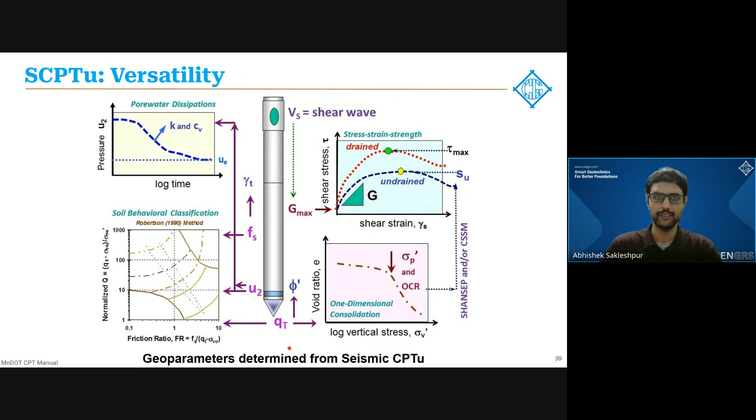In terms of data comparison between the seismic CPTU versus other tests, for example the cross-hole seismic test, here is an example where we did both seismic CPTUs and cross-hole seismic tests, and we can see a good match between the two results for the shear wave velocity.

However, the key difference to keep in mind is, although the shear wave velocity values are comparable, you can save significant cost and time with the seismic CPTU, because with the cross-hole seismic test you have to drill multiple boreholes. You need a source borehole to generate the seismic waves, and then two receiver boreholes, plus placing annular PVC pipes and using grout to set the pipes in place. All that takes significant time and cost, which can be eliminated with the seismic CPTU.

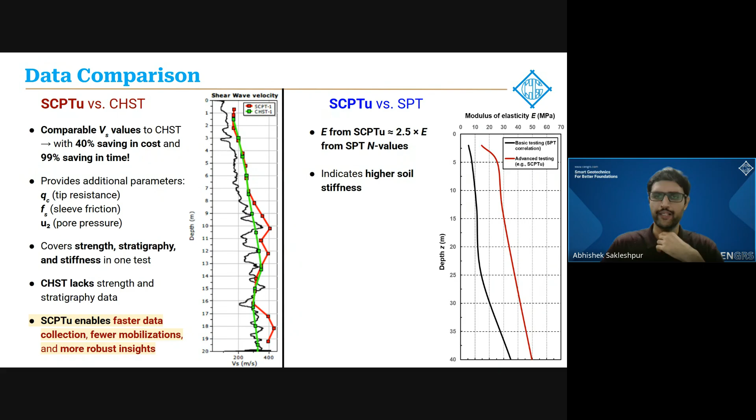When we compare the seismic CPTU with the standard penetration test, the key advantage is that the SCPTU, as Mr. Sorabh Gupta mentioned, if you use your typical Bowles correlation correlating the E value with the SPT N value, it is typically very conservative and you get very low values of the modulus. Whereas from the SCPTU, what we found is you can get up to 2 to 2.5 times higher modulus values, which directly indicates that you were underestimating your soil stiffness.

So by getting realistic values of soil stiffness, you can then justify higher net allowable bearing pressures, which corresponds to smaller foundation sizes, faster construction, and a reduced overall cost.

Now, the best practice would be to combine and cross-check. So what that means is you can pair seismic CPTUs with standard tests like SPT, the pressure meter, or cross-hole seismic test for a multidimensional site model. The more information or data you can have about your site, the better informed decisions you can take, and the better you can optimize your foundation design.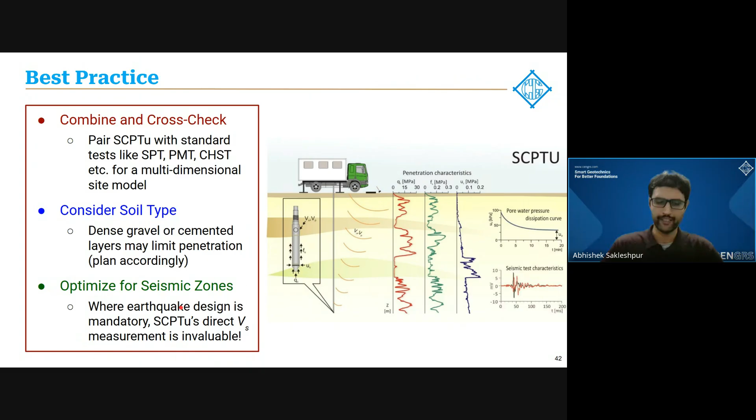However, it's important to keep in mind the type of soil you expect on site, because if you expect dense gravel or cemented soil layers, that may limit cone penetration, so you have to plan accordingly. In such cases, you could go with the cross-hole seismic test to get the shear wave velocity. And where we have seismic zones and earthquake design is mandatory, the seismic CPTU's direct VS measurement is very valuable.

Now let's look at some applications of CPTU and SCPTU. The CPTU or the SCPTU can be used for various types of projects, starting with pre-bid or pre-tender investigations, if you're interested to obtain a quick estimate of the ground stratigraphy and the site conditions.

It can also be used for confirmatory geotechnical investigations. So, for example, if you already have boreholes that were done on site but you'd like to validate or verify those borehole investigations, this is particularly suitable for that purpose.

You can also use it for detailed ground investigation and site characterization. In addition to these 5 measured parameters, you can get a whole bunch of interpreted parameters as shown here, covering strength parameters, stiffness parameters, as well as stress history parameters.

And finally, for ground improvement control, if you compare pre-ground improvement and post-ground improvement CPT data, you can then attempt to quantify the degree of ground improvement that was achieved.

So other applications of CPT results: foundation design, where we can use the CPT data to estimate bearing capacity and settlement. Typically these design methods can be classified into direct design methods or indirect design methods. In direct design methods, you directly use the cone resistance, for example, to estimate bearing capacity or do settlement calculations. In the indirect methods, you use the CPT data to estimate shear strength parameters, such as your C-phi parameters, and then calculate bearing capacity using your conventional bearing capacity equation.

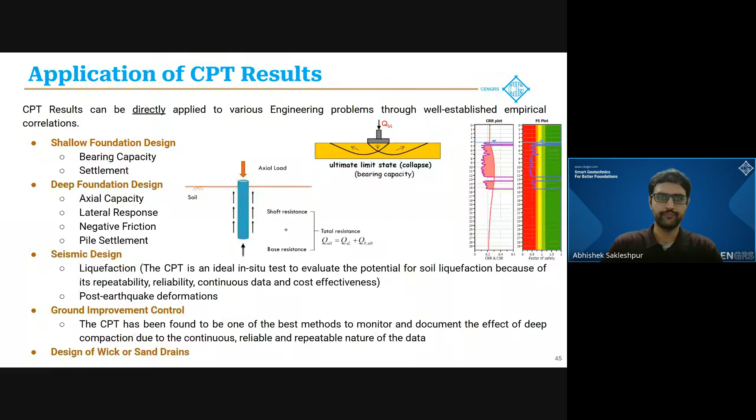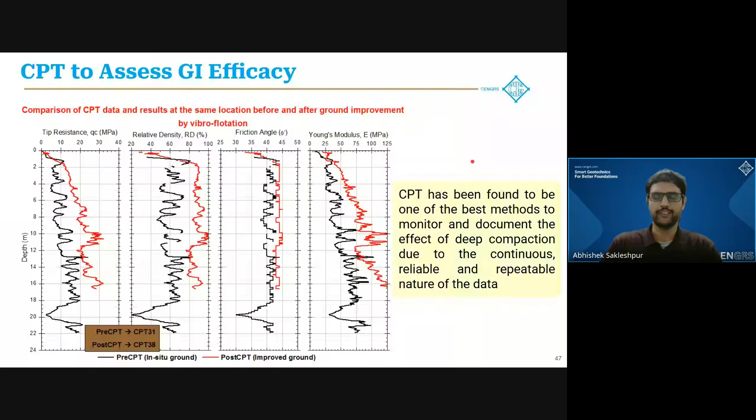In terms of assessing ground improvement efficacy, the black solid line shows CPT results before doing ground improvement. After doing the ground improvement and post ground improvement CPTs, you can see an increase in the cone resistance. The relative density has increased due to the densification produced by the vibroflotation technique used here, along with an increase in the friction angle and the Young's modulus profile. So the CPT is particularly advantageous for QA/QC of ground improvement.

In terms of using shear wave velocity in static or dynamic analysis of foundations, the key link is that from shear wave velocity you can get your dynamic shear modulus, or small strain shear modulus. From there, you can go to your dynamic Young's modulus. And if you degrade your dynamic Young's modulus using Vucetic-Dobry type degradation curves, you can get the E value to use in settlement analysis, in static analysis for foundations.

Identification of cemented soils is a topic of ongoing research, but I'll briefly touch on it. Basically, the cone resistance is a measure of the large strain soil strength, whereas shear wave velocity is a measure of the small strain soil stiffness.

When you combine the two together, you get this kind of chart, which comes from Robertson 2016. On the y-axis is the normalized cone resistance, QTN, given by the equation here, which is the cone resistance normalized for overburden pressure or effective stress. On the x-axis is the parameter IG, which is your small strain shear modulus divided by the net cone resistance. The net cone resistance is your total cone resistance QT minus the vertical total stress.

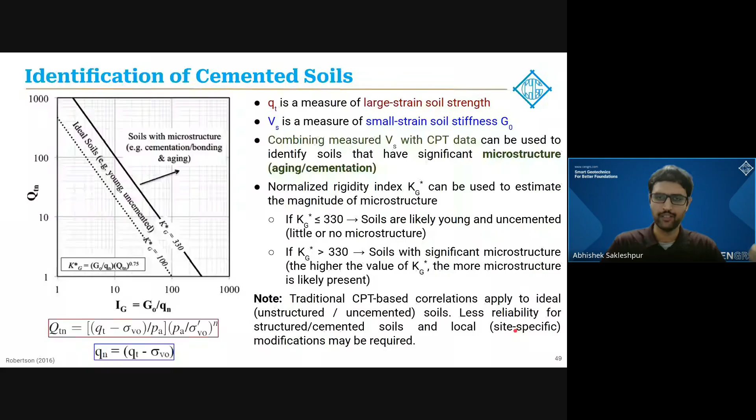So through this parameter: if it's less than 330, your soils are likely young and uncemented; more than 330 indicates significant microstructure, and the higher the value, the more the degree of cementation or aging likely present. An important note is that traditional CPT-based correlations have typically been developed based on a database of young, uncemented, or unstructured soils. So in certain cases where your site consists of structured, cemented, or aged soils, it may be important to develop local or site-specific correlations when interpreting the CPT data.

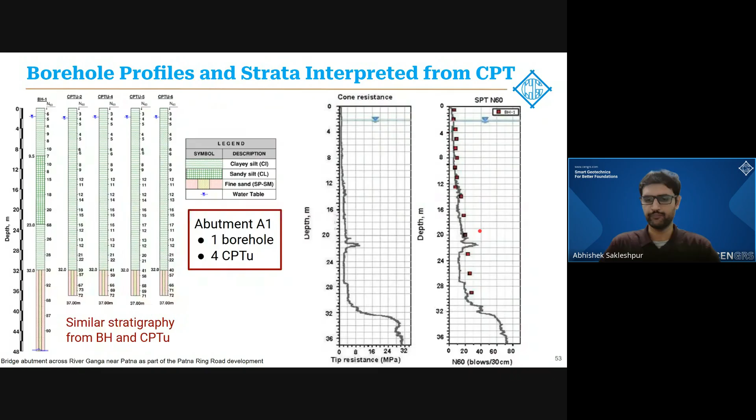When we did calculations for pile capacities, from boreholes using conventional c-phi analysis as per IS 2911, we got an ultimate pile capacity of about 12.8 meganewtons, whereas using the CPTU Robertson design method, we found a total pile capacity of about 17.6 meganewtons. This was for bored cast-in-situ piles placed up to a depth of about 35 meters below ground surface. By using the CPTU, we obtained 38% higher pile capacities compared to the conventional borehole approach, which allowed the client to optimize the foundation length and cost.

Another case study where we did a detailed ground investigation and site characterization was for a high-rise group housing project in Sector 104, Gurgaon. This included high-end high-rise towers of about 40 stories - 5 towers of 40 stories and 2 towers of 30 stories with 3 basements - plus a commercial building and other facilities.

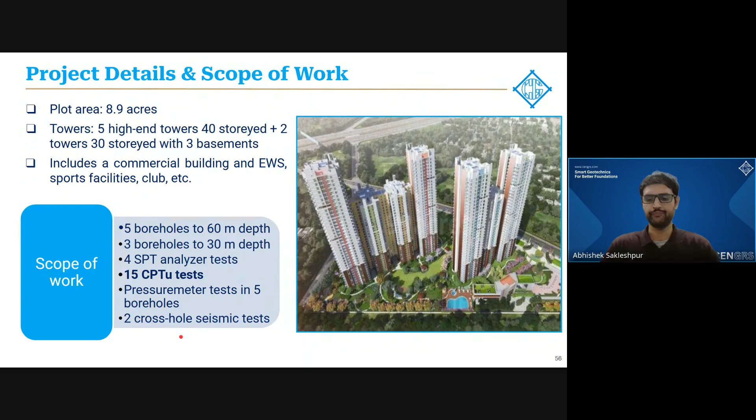The scope of work included a hybrid approach with a mix of boreholes, SPT energy measurement, CPTU tests, pressuremeter tests, as well as cross-hole seismic tests. As Mr. Sorabh Gupta mentioned, this was like a gold level geotechnical investigation. In terms of borehole profiles and strata interpreted from the CPT, since it's in the Indo-Gangetic plains, the soil profile consisted of sandy silt of low plasticity with intermediate silty sand zones. Groundwater was met at a shallow depth of about 3 to 6 meters below ground surface.

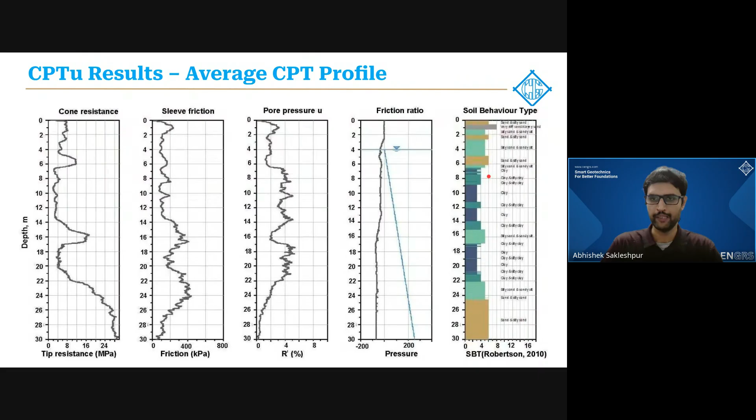These are the CPTU plots, showing the average of results across the multiple CPTs done at the site - your typical cone resistance, sleeve friction, pore pressure, friction ratio, and soil behavior type. These are the various interpreted parameters as we saw earlier. We also overlaid laboratory test results on the CPTU interpreted parameters and found a very good match between the two, providing additional corroboration and confidence in the measurements.

Again, these are constraint modulus and Young's modulus. I want to emphasize that the square data points are from the SPT N value using Bowles' correlation, for example, to get the Young's modulus. Whereas if you do CPTUs, pressuremeter tests, and cross-hole seismic tests, we obtained much higher values for the Young's modulus compared to what we got from boreholes.

For shear wave velocity, again there was a good match between the measured shear wave velocity from cross-hole seismic test and the CPTU interpreted shear wave velocity.

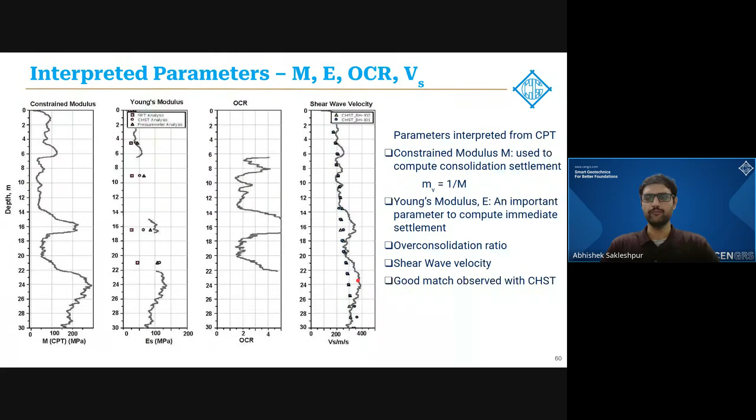For the foundation type, both isolated foundations and large raft foundations, we did bearing capacity analysis at various foundation depths ranging from 12 to 16 meters. Using conventional c-phi bearing capacity analysis as per IS 6403, the net safe bearing capacity was in the range of about 30 ton per square meter, going up to about 50 ton per square meter for these types of foundations and depths.

Whereas when we did the analysis using CPT and the pressuremeter, we obtained much higher net safe bearing capacity values. This corresponded to an increase in the SBC ranging from about 50% all the way up to about 80-90% or so.

It's not only important to do bearing capacity analysis, but also settlement analysis, because your design net allowable bearing pressure is the minimum of what you get from the two analyses. When we computed net bearing pressures for 50 millimeter settlement, comparing the conventional approach based on immediate plus consolidation settlement versus advanced testing using CPT and pressure meter, we obtained higher net bearing pressures through advanced testing, ranging from 60% up to as much as 100% and beyond.

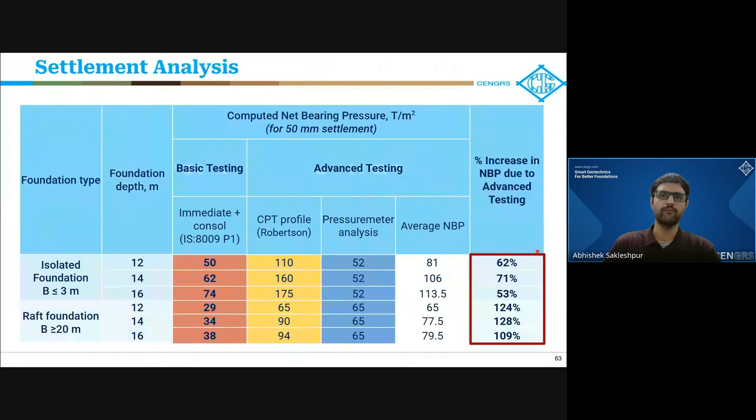We also did calculations for safe pile capacities for 1000 millimeter diameter bored cast-in-situ piles. The pile lengths ranged from 26 to 32 meters below the cutoff level, which was at 12 meters below the ground surface. Again, with the help of advanced testing, we were able to justify higher pile capacities ranging from 60 to 80% as compared to what we got from the conventional approach.

So how does this all translate into time and cost? As Mr. Sorabh Gupta mentioned, we were able to increase the SBC by about 88% through advanced geotechnical investigation, and we were able to eliminate a piled raft foundation system and go with a pure raft foundation. This reduced the construction time by about 2 to 3 months. Because the piles were completely eliminated, we reduced the piling cost and also saved on the carbon footprint. In terms of overall foundation cost, we achieved about 16 crores in savings just by improving the scope of the geotechnical investigation. This turned out to be a return on investment of 3,600% from good geotechnics.

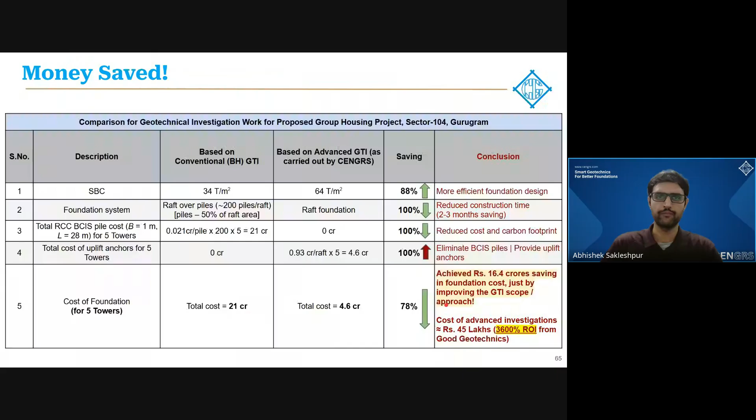The last case study, which I will close with, is a confirmatory geotechnical investigation and liquefaction susceptibility assessment for the Palasbari-Sualkuchi Bridge in Guwahati, Assam. Here, boreholes were already done on site by another agency, and we were called in to do seismic cone penetration tests for confirmatory work and also to assess the liquefaction susceptibility at the site.

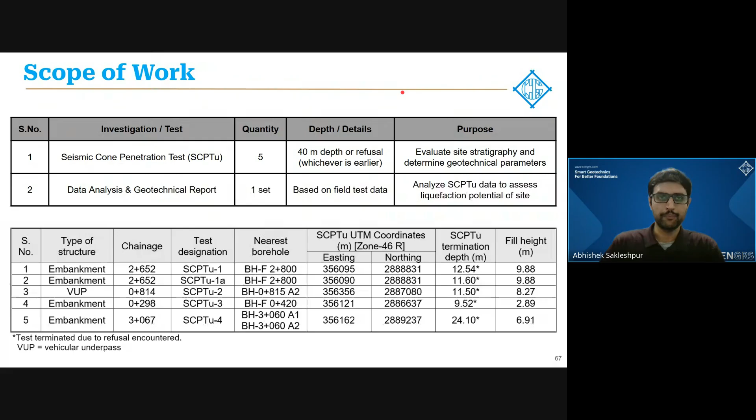Because this is in Guwahati, Assam, as per the new IS code, this falls in zone number 6, with an earthquake magnitude of about 8 and a peak ground acceleration of about 0.5 G, if I'm not mistaken. So liquefaction is particularly critical in the northeast part of India.

Site stratigraphy interpreted from CPTU: we did 5 tests here and obtained comparable stratigraphy from the various tests. In the upper part, we again found silty clay, silt kind of materials, transitioning to sandy soils as we went deeper into the soil profile.

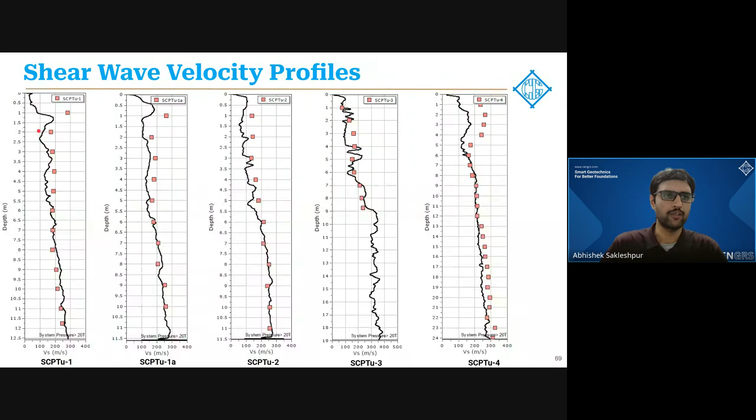For shear wave velocity, we found a good match between the measured shear wave velocity from the seismic cone penetration test, shown as the scattered data points, and the CPT shear wave velocity derived through correlation with cone resistance.

In terms of the liquefaction susceptibility assessment, based on conventional boreholes and SPT, a depth to liquefaction of about 7.5 meters was estimated. But when we did the cone penetration test and seismic cone penetration test, we found the depth of liquefaction was actually 5.5 meters. This directly translates to savings in ground improvement cost, because you don't need to install stone columns, for example, up to deeper depths. Not only was the depth of liquefaction reduced, but also the liquefaction potential index and the liquefaction induced settlement.

We found that you could reduce the liquefaction induced settlement through the use of advanced testing. Another way to look at it is that conventional SPT-based methods tend to overestimate the risk of liquefaction and liquefaction-induced settlements.

With that, I will close my presentation, and I thank you so much for the opportunity to present this with you, and I welcome any questions.